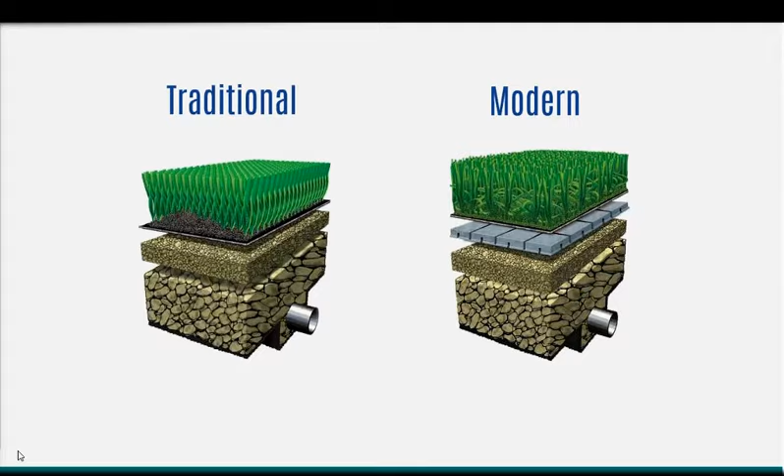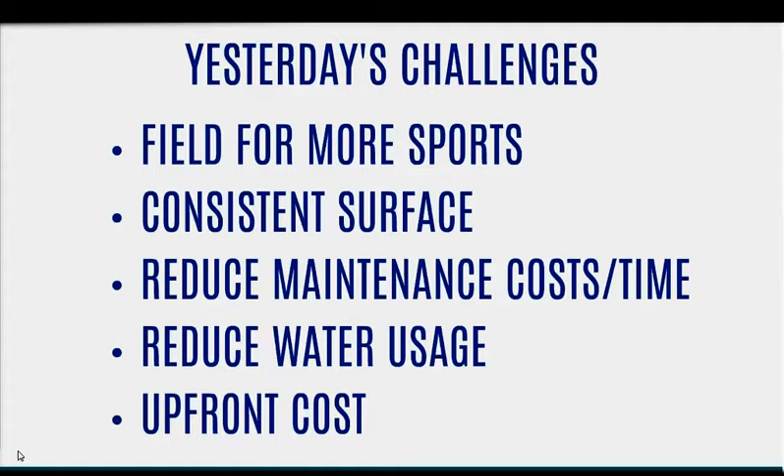So in the early 2000s, when the crumb rubber infilled systems became prevalent, field owners were solving for things like having a field that could withstand more use, having more reliable, consistent playing surfaces, reduction in costs, time to maintain, reduction in water usage, and the upfront costs associated with a new synthetic field.

If you flash forward to today, field owners have become a little bit more savvy and knowledgeable about the pros and cons of synthetic turf, and they're trying to solve for a whole new set of challenges, including but not limited to surface heat, reducing concussions and head injuries, building a sustainable system, reducing chemical exposure, and of course upfront costs and now life cycle costs come to the forefront as well.

The infill market is growing rapidly, and that's probably an understatement, in an effort to address these new challenges and concerns. In our travels, and when I say our, I mean Adam and I, we've seen a pretty significant gap in understanding of how these infills all perform and all these different characteristics that make up a new system.

So over the next 25 minutes or so, we'll take you through each infill one by one. We encourage you to follow along with your infill sample tower, and once we have covered each infill individually, we'll then compare all 6 of the major categories with some visuals.

We will be as objective as possible. Admittedly, we do have an intimate knowledge of the coated sand category. Our flagship product, of course, is Envirofill. So just help us stay honest along the way.

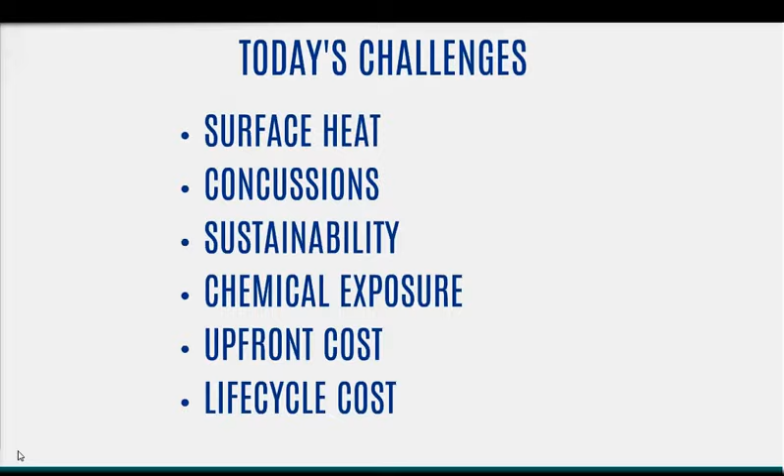All right, this will be more technical than our first presentation, but certainly not intended to be all-inclusive. There's an infinite amount of tests and things that could probably support each variable to the infill, pad, and turf system, but we're going to try to cut through that clutter and kind of boil it down for you.

The overall intention is to provide further insight into the materials and help provide some guide rails or some guidance as to what may be the best for your unique challenges and considerations.

So we sent out an infill tower to all those who registered before yesterday. We really felt that it'd be more effective if you could experience the products while we were talking about them. It's one thing to kind of talk about it conceptually, but I think it's another thing to put the products in your hands, experience them for yourself, and kind of draw your own conclusions along with ours.

So we'll start with the bottom of the tower and work our way up. We welcome you to open the tower and follow along. You can take the product out, put it in your hands, kind of roll it between your palms and experience it as an athlete might on the field.

All right, so as we review each of these products, this is what the criteria will entail: surface heat, understanding how the infill can assist in making the surface less hot. Crumb rubber will always be our benchmark that we're trying to improve on, and all these infills will produce some heat benefit, cooling benefit over a crumb rubber system.

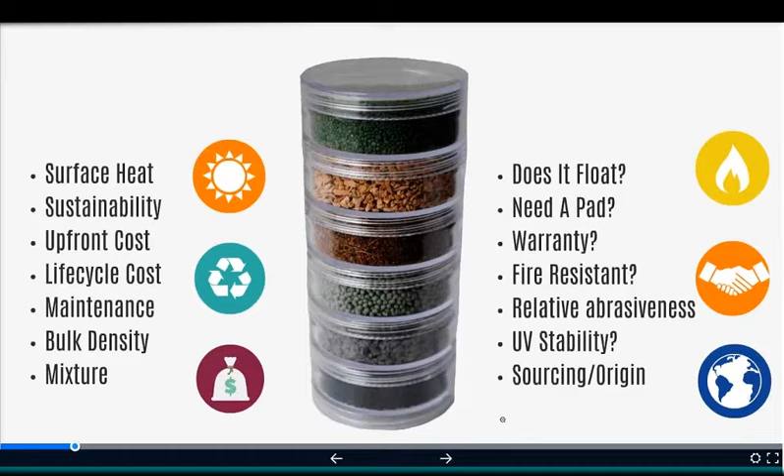There are 4 major categories that were covered today, and then a 5th category of infills that don't really meet the criteria or fit as neatly into the other 4 categories. Then we'll close, as Stephen mentioned, with charts that will boil all this information down and give it to you in easy to read charts.

All right, first up is a product we're all familiar with, and that's crumb rubber. It's been widely used for the past 18 or so years, and frankly designers are really comfortable using and specifying it. While the performance might not always be ideal, it's known and somewhat predictable. Designers at this point know the turf height, the density required, the amount of rubber and sand they should specify, and they also know the range of cost for the product, so it's fairly easy to predict the budget and how the bids might come in.

This product has come under intense scrutiny because it's been surmised that one or several of the 96 chemicals in crumb rubber might be carcinogenic to young athletes. And while that's a serious issue, we're not here to take a side, but rather open the possibility of incorporating one of the other many great infill products available on the market today, and expand the thinking beyond crumb rubber.

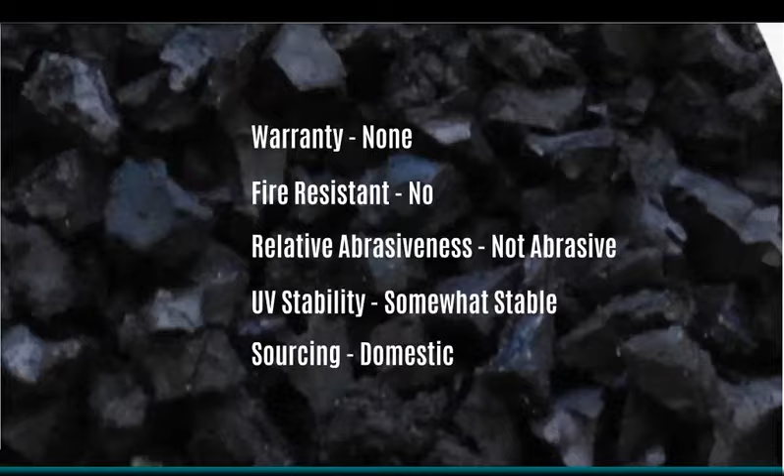The next category is virgin rubber, and these of course play very similar to crumb rubber systems. If an owner is looking for similar playability, they have the choice of two types of virgin rubber, EPDM and TPE. The distinct advantage of these products over crumb rubber is that they are virgin, so they can be made up of known components which can be modified to avoid specific chemicals.

Virgin rubbers can be put in the same tall pile height as crumb rubber. However, because of the cost, one approach is to lower the pile height and add a pad.

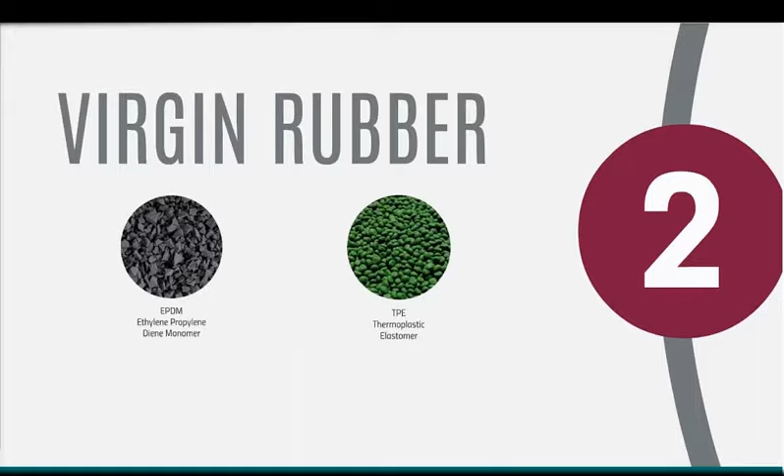EPDM is most commonly known as track rubber, and it comes in a wide range of colors. You'll see by the gray sample in your tower, its shape is irregular, just like crumb rubber.

The lighter EPDM colors can be used to reduce the surface temperature and reflect more of the sun's energy. I think it's important to clarify that while some heat benefit can be gained by this product and some of the other products we're going to list today, it's by no means a cool solution. We think a more accurate description is less hot, and you'll hear us use that term throughout today's presentation.

To build on that a little more, if it's 95 to 100 degrees outside, your synthetic turf with crumb rubber could be somewhere around 170 degrees. Now, if one of these products lowers your temperature by 20, 30, 40 degrees, that's great, but you're still dealing with a surface that's anywhere from 130 to 150 degrees. So I think the best description here is less hot.

EPDM is not recyclable. It is a chemically set product that can't be reversed. The cost of EPDM is somewhere in between crumb rubber and TPE.

It should be noted that not all EPDMs are created equal. Granules based on EPDM actually only contain about 20 to 25% EPDM rubber. The rest consists of things like chalk, processing oil, UV stabilizers, antioxidants, pigments, and other vulcanization materials. So the quality can really vary wildly between manufacturers and from product to product. As a specifier, you really need to do your due diligence and specify the right EPDM for the application.

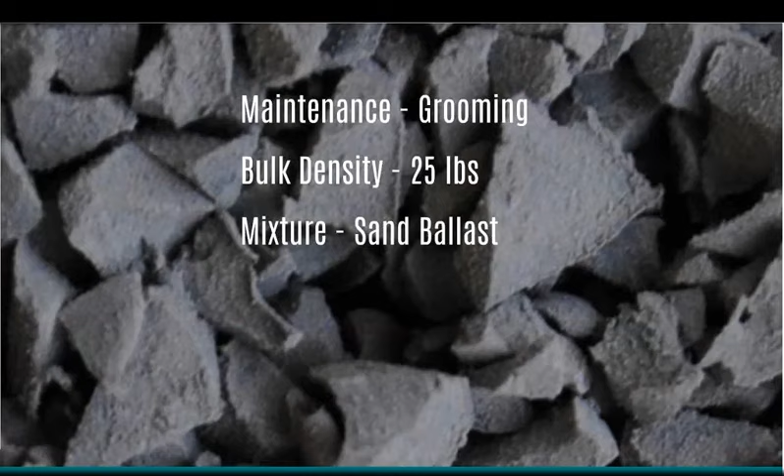Just like crumb rubber, it's always used with a subangular sand. And again, some of it will float due to the surface area and trapped air, but the specific gravity is greater than 1, so it will sink over time.

While EPDM does provide resiliency, we see it mostly installed with a pad. The warranty range, depending on manufacturer, is between 8 and 10 years. And it can be made fire resistant with additives.

Just like crumb rubber, it is an angular rubber product, but still very resilient, so we'll put it into the non-abrasive category. For UV stability, we note that it's somewhat stable, just because we know that UV can really wreak havoc on rubber products in direct sunlight. And it's available both domestically and internationally.

All right, so next up is TPE, and it's very similar to EPDM with a couple exceptions. For one, you'll see by the image on the screen and the product in your tower that it's very uniform in shape. Another exception is that it is thermally set, not chemically set.

I know Stephen mentioned this analogy in the last webinar, but it's worth repeating because we get a lot of questions about the difference between these products, and this is the best way to keep it straight. So if you think about asphalt, like TPE, being a thermally set product, the components are able to be separated once heat is reapplied. But concrete, like EPDM, is chemically set and cannot be reversed.

So in much the same way, TPE is recyclable, but also susceptible to softening during high heat if the right solar radiation zone product is not selected.

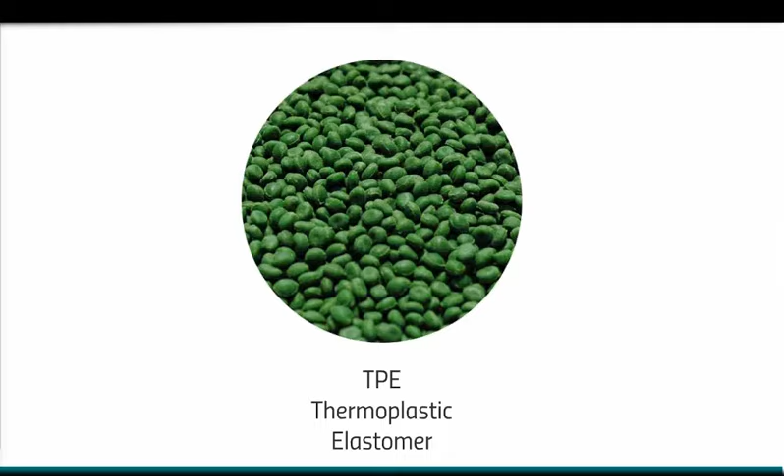All right, so let's get into the details here. Just like EPDM, the lighter colors, so most commonly light green and tan, can help reduce the surface temperature by reflecting the sun's energy.

We put somewhat sustainable, so we did identify that it is recyclable. However, there's a difference between theoretically recycling it and actually logistically going through the process. The challenge here is removing it from the sand ballast. The particle sizes are really similar between TPE and sand, and they really only differ in their bulk density. So in order to recycle the TPE, it would need to be processed to remove and separate out the sand, and as of now, we know of no such process that can do so on site. That's why this one is going to be somewhat sustainable until the technology can catch up to it.

Of all the virgin rubber materials, TPE is the most costly. As with EPDM, it's important to select high-quality producers who understand how a product in this application should be produced. And TPE is not reusable for multiple turf life cycles. Therefore, new TPE would need to be purchased when a field is replaced, thereby giving it a high life cycle cost.

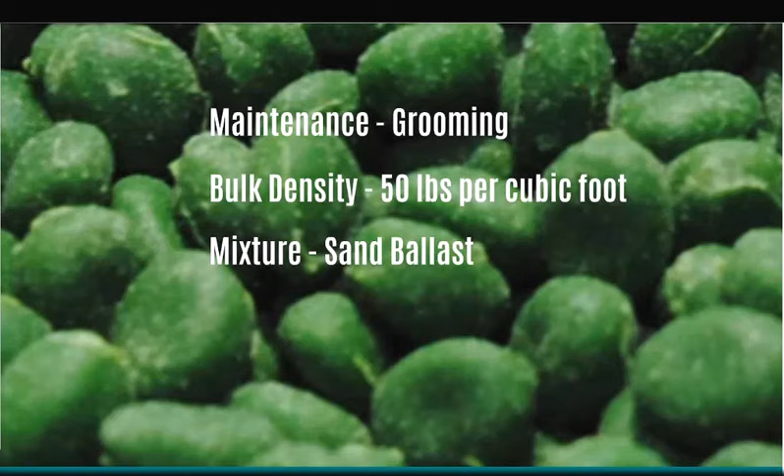Like all the other rubbers, it's almost always used with a subangular sand. And to elaborate on that a little bit, the sand is used as a ballast. You need a certain amount of weight on that sports system to hold it down so it doesn't wrinkle when you have a big lineman cutting, or move with expansion and contraction with the temperature.

This product doesn't float, and a pad is recommended. So while TPE does provide resiliency, a pad is often installed. Usually for near the same cost as an additional pound of TPE, one can install a pad.

So we see a lot of field owners go ahead and opt for the pad, which can be used for multiple life cycles. It's more of a long-term investment. And then they shrink down the pile height to maybe 1.5 inches or 1.75 inches in order to use less TPE.

The warranty ranges from 8 years for hot climates up to 10 years in cold climates. Like EPDM, fire resistance is available with additives.

And if you pick up the TPE, you'll notice that the granules are quite consistent and resilient. As compared to the EPDM, the TPE will compact less because of the consistent shape of the product. Later in the presentation, Stephen will show you a chart that will show the relative abrasion of all these products.

UV stability, we put somewhat stable, or kind of a medium rating, because you really need to be cautious where you're using these products and what solar radiation zone you're in. And this product is available both domestically and internationally.

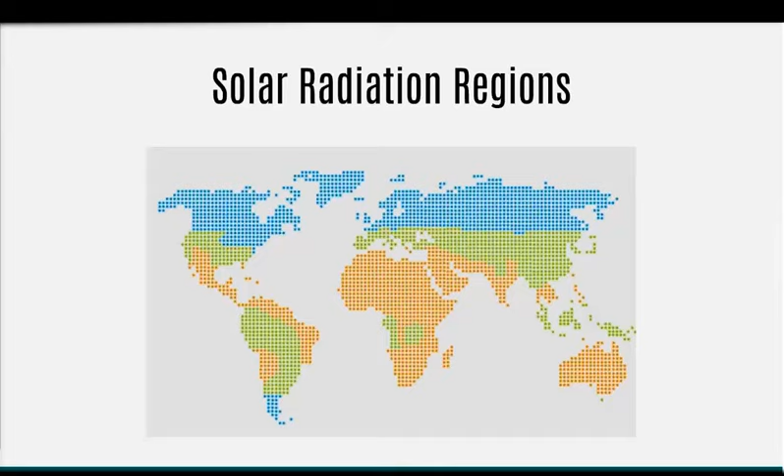So my guess is that they chose the less expensive product and didn't take the more conservative route of going with the one that's going to be more resilient in that environment. So they certainly won't all melt, but if you select the right TPE, it will hold up in that environment. It's just really important to understand that not all TPEs are created equal. Great.

So organic infills are kind of following the same trend as organic fruits and vegetables, organic cotton clothing, organic cleaning products. All these things have attracted a lot of attention in the last few years as our world seeks to get back to natural products. So the thought with organic infill is sort of a 'you can't beat her, join her, Mother Nature' type of approach, and the desire is to avoid chemicals and other synthetic additives altogether.

So we're going to cover two categories of organics: coconut and cork.

One of the products that's been around for quite some time is Corkonut. It's been around since about 2004 and is a blend of cork granules and coconut fiber. Both of these products degrade really slowly, and sometimes they're actually joined up with another product like rice husk.

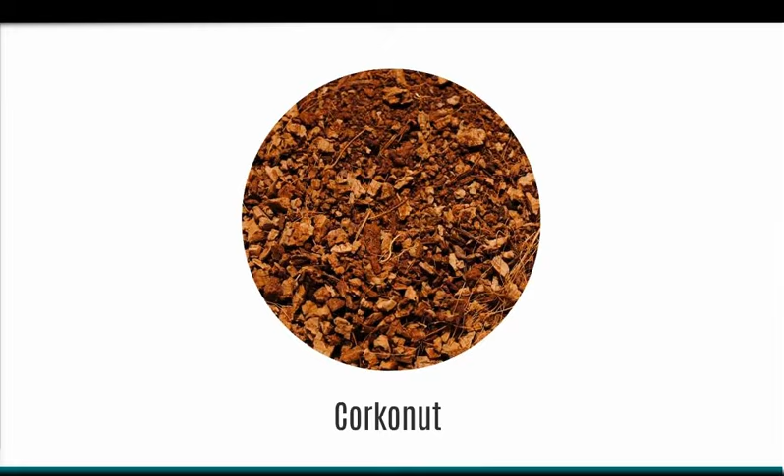Corkonut is really good at retaining moisture and releasing it over time through evaporation, and this mimics Mother Nature's cooling capability of natural grass. However, unlike natural grass, which can bring moisture from the soil below through the root zone and then release it into the air, organic infill must be regularly wetted to activate the cooling process.

This is challenging for arid climates which don't have regular rainfall. As a result, if these products are installed in dry climates, you have to add a watering system to your field. This can be either a permanent system, like an 8-head, 4-zone type of system, or a temporary system like a large hose wheel. Either way, it's going to require a lot more management to maintain ideal conditions, which is about plus or minus 50% moisture content.

It's going to require a lot more management than other infill products, so it's really important that your maintenance staff and team is prepared adequately and trained to be actively involved in managing this type of system.

Cork and coconut are both renewable resources. It's interesting that the cork tree is harvested every about 9 to 12 years, depending on conditions, while coconut trees are harvested year-round - there's no season, they just continually put out coconuts. If we look at the LEED definition, a rapidly renewable product is one that has a harvest cycle under 10 years. So both of these qualify, although cork is right on the edge, depending on conditions.

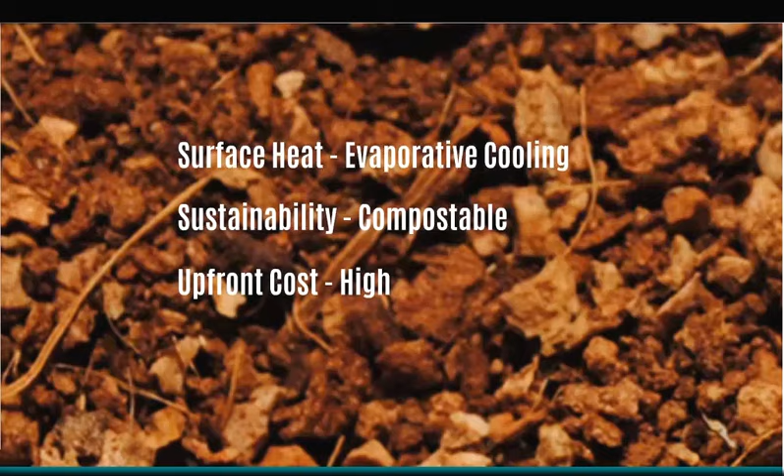At the end of the field's life, this product can be reclaimed, composted, or even mixed with topsoil, which is a significant advantage over taking it to the landfill. In addition to the product cost - 2 pounds of the coconut blend with 3 pounds of sand - the field owner should also consider the regular top-off of the field, irrigation, and active management over the field's life.

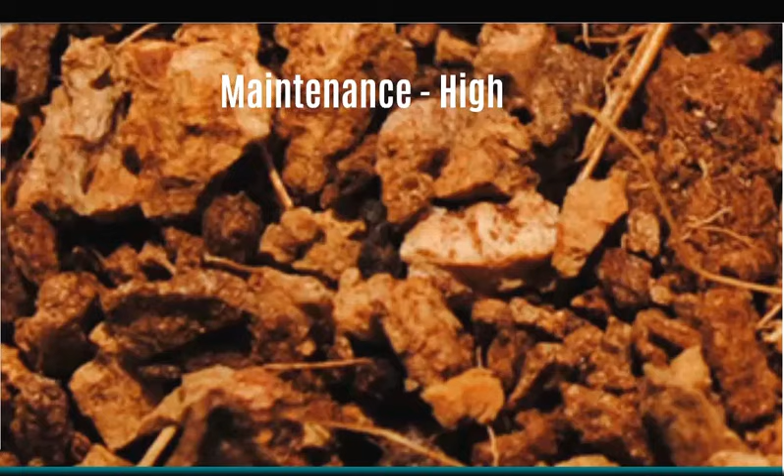Active maintenance is required, as mentioned, to ensure optimum moisture content is maintained. Also, the material has a tendency to move or float in heavy rainfall, so I would plan for some regrooming and redistribution of material, especially in high-use zones. Settling and degradation does occur over time, so periodic application of new material must be taken into account. Usually when the field is installed, they'll provide the owner with some attic stock that they can use over the years to address areas that may need attention.

The bulk density is about 10 pounds a cubic foot, but it really depends on the blend between the coconut and the cork. Because of their light bulk density, pretty much all organics will use some sort of sand ballast.

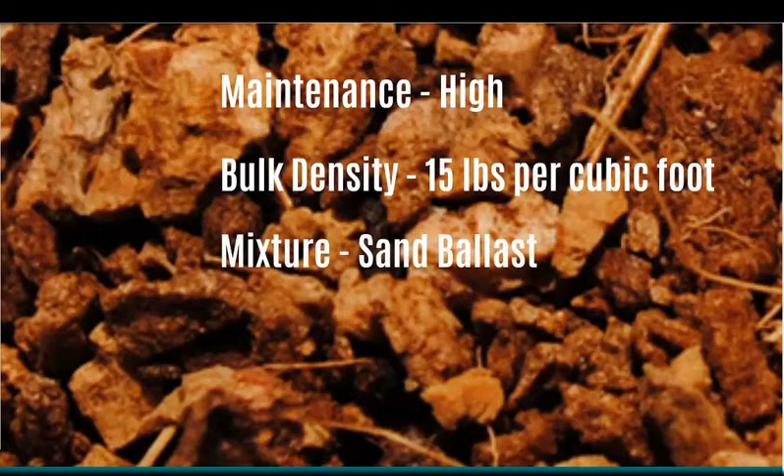This product is designed to absorb and release water. If you put these products in water, you'll see that the cork stays on the surface, as does the coconut, until the coconut absorbs the water and then falls to the bottom. But the cork will remain on top for a long period of time.

A pad is recommended, so while the cork does provide you some resiliency, the pad ensures that you have consistent resiliency over the entire field.

This product does not have a warranty. Cork by itself is fire resistant, but the coconut fibers themselves are not.

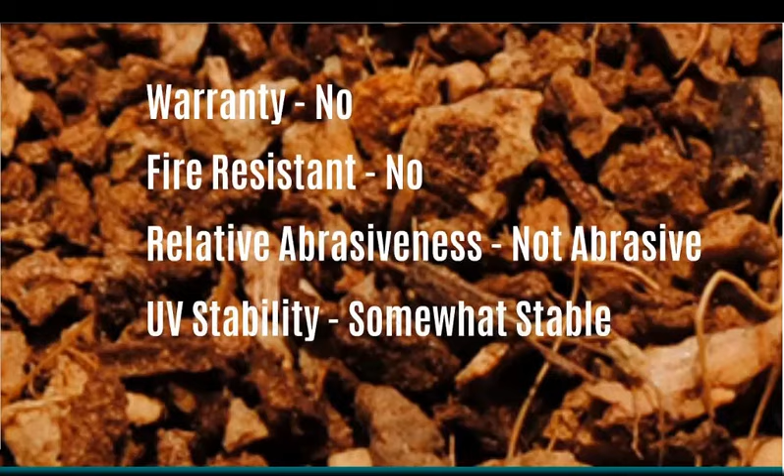It's not abrasive. When you pick it up in the sample tower there, you can see that it's actually quite soft. And again, like the other organics, this product will break down with extended UV exposure.

The sourcing of both of these products is international. Cork primarily comes from the Mediterranean region. Actually, 50% of the world's source of cork comes from Portugal. And the other regions include South France, South Spain, Italy, and some in Northern Africa.

Now, the coconut portion of it is actually sourced in Asia. Sri Lanka and India are among the biggest providers of coconut fiber.

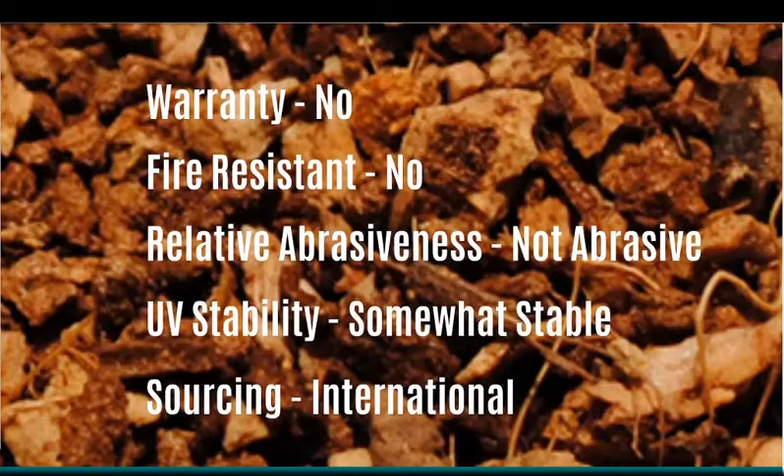So another option for an organic system is using cork strictly by itself. Cork does not absorb water, one of the great reasons it's used as a wine cork. But it is compressible and recoverable.

Just a few quick facts about the cork tree. It's first harvested at age 20, and then every 9 to 12 years until it reaches about 200 years of age, when it's no longer productive. Its peak harvest is around year 80, when it produces about 440 pounds per tree.

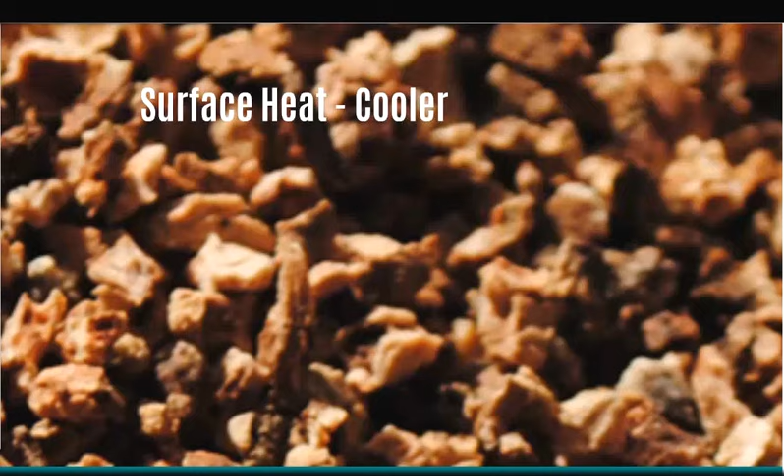So the primary reason to use cork on your field is to reduce surface temperature. Cork absorbs a lot less solar radiation than crumb rubber, but because it doesn't absorb water, it does not cool through evaporative cooling like a coconut product would.

Cork is a renewable resource, and like I mentioned, it's right on the edge of being defined as a rapidly renewable resource, but we might just be splitting hairs there. And it must be sourced from the place that it's grown, which is the Southern European region.

So the cost per pound is the highest of the infill options we'll cover today, but again, it needs less poundage to take up the same amount of volume as the other products.

Life cycle cost: field owners should account for migration of the material. It's naturally non-static, so it won't stick to your clothing. However, wind motion and water will really cause this product to move around the field. And I'll invite you to open up your infill tower there, and you'll see how drastically light this product is.

This product will need active maintenance to ensure even distribution across the field, since the material does have a tendency to float or move in heavy rainfall. Periodic application of new material should be taken into account, and some of that can be done by facility personnel, while some of it has to be outsourced to a contractor.

It can be used as a top dressing over top of, say, a crumb rubber field, but when used by itself, it's primarily used with a subangular sand. It does float. Interestingly, it is fire resistant, and from an abrasive standpoint, it is the least abrasive of all these products—really quite soft.

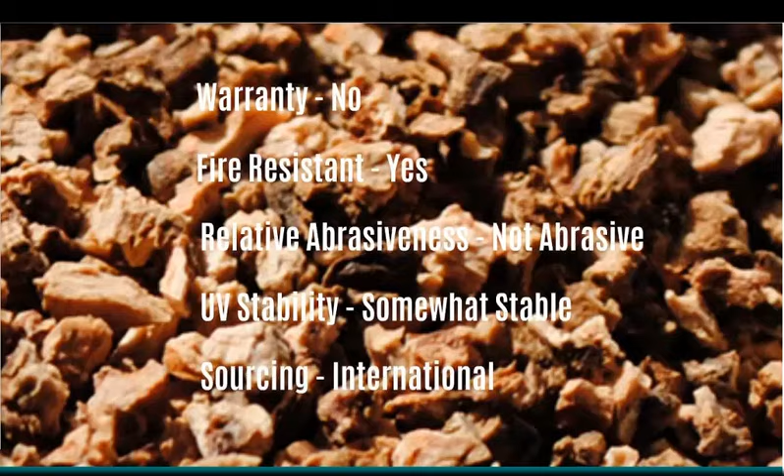Like other natural products, it will break down with exposure, and we covered that the sourcing is in that Mediterranean region.

We did have two more questions come through while you were working through cork. Is there a testing protocol for agricultural products regarding pesticides, agricultural or organics?

That's a good question, because we certainly don't want to trade one concern for another. The one I would lean on or refer to is the Synthetic Turf Council Infill guidelines. In 2015, STC, an industry group that helps support and guide the industry, developed a list of guidelines and testing protocols that can be used for any type of infill.

Circling back on the question about warranties, it definitely looks like two of the larger cork and coconut producers do have an 8-year warranty. So again, we ask you to keep us honest—you guys are doing that. We'll take a look at that and update for the next presentation.

Thank you. Great. I'm actually going to take over here for just a second and take us through the coated sand category. As mentioned at the onset, we do manufacture a coated sand product called Envirofill, but I hope we've shown our objective approach to alternative infills, and the same is going to hold true for this category.

Our thinking is that there's not one product that is right for every customer situation, and there are a lot of new products on the market that haven't been fully vetted. Envirofill has been produced in Texas since 2005, so its properties and performance are well known and documented. It's based on a round sand core, which is coated with a very durable acrylic polymer.

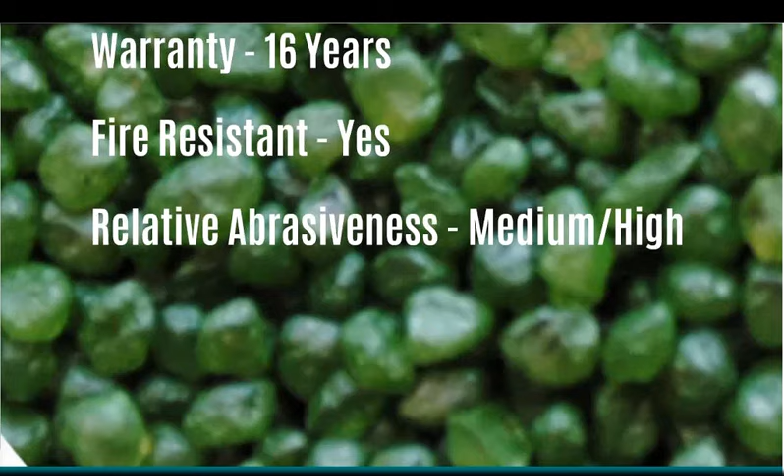It has a 16-year product warranty. It is fire resistant. And Envirofill is going to be more abrasive than the other infills we're talking about today. As is the case with all infill, abrasion becomes less of a concern as the turf fibers begin to fibrillate.

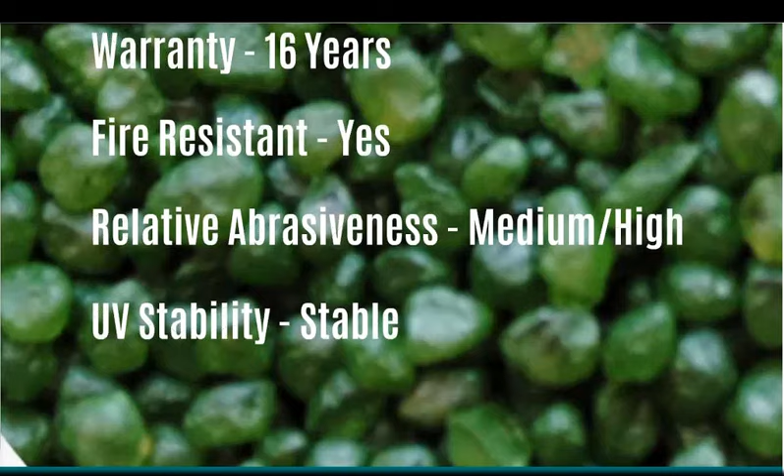Coated sand is very stable in an external environment, and finally, it is sourced domestically. It's made in Texas.

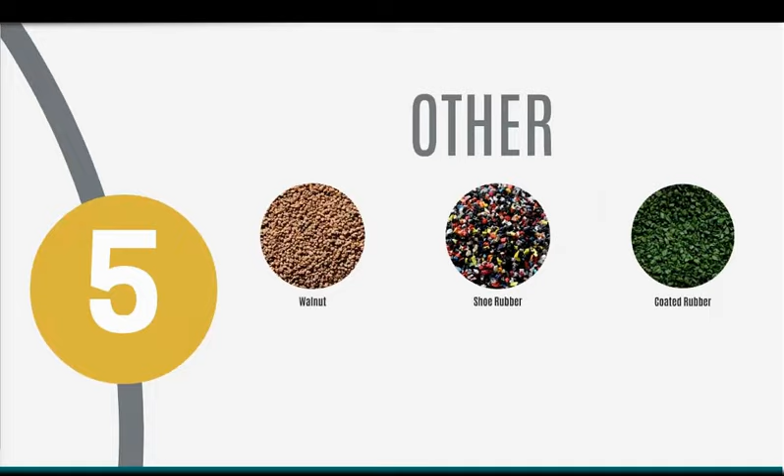So another organic that's been developed and tested in just the last few years is walnut shells. Walnut shells are the hardest nut shell on the planet and are grown here domestically. The shells are ground up to various sizes, some of which are ideal for sports systems.

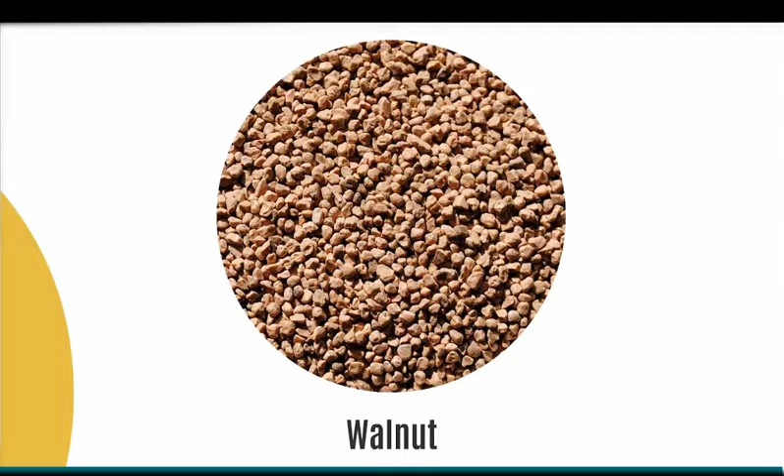Now, one of the drawbacks that's been called to attention is that there's a tree nut allergy issue in our schools. So how can we introduce a product in the field that may exaggerate that issue? There are some processes in development that will remove that allergen and create a safe product. Also, like coconut and cork, this product degrades very slowly over time.

So this product is pretty interesting. It's recycled shoe rubber, and it's also known as Nike Grind. Most of the feedstock is post-industrial, while some of it is derived from post-consumer.

There are shoe recycling facilities in both Memphis, Tennessee, and Belgium that take any type of gym shoe, separate it from the upper sole, and grind it up. There's also a facility in Asia that processes pre-consumer rubber waste, like off-spec material that was destined for shoes.

A full-size soccer field requires about 75,000 pairs of shoes. So as you might imagine, the availability of this product is pretty limited, and the manufacturing processes continually look to reduce waste. So I think over time, this product could be less and less available.

And actually, to my knowledge, few people actually recycle their shoes. So for that reason, it's sometimes used in combination with crumb rubber or one of the other virgin rubber materials.

The process is actually pretty cool, and there are some YouTube videos available online. There's a website called lessismore.org, and you can find information about how to be one of those people that actually recycles their shoes.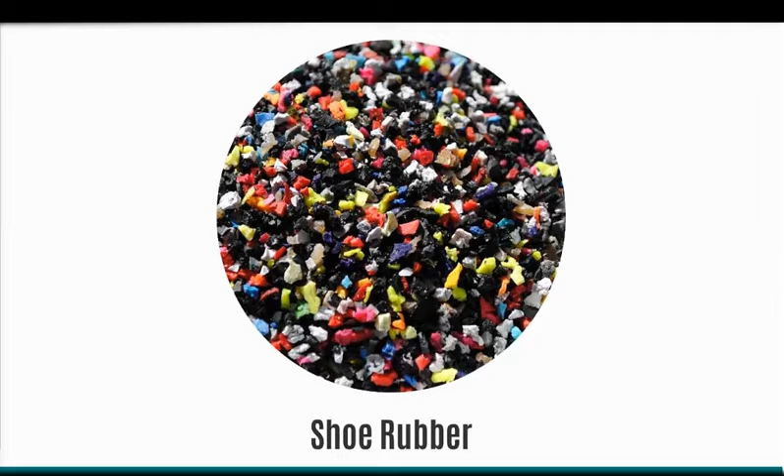So coated rubber is another infill option. It coats the rubber, or the SBR, or recycled crumb rubber, with a polymer that not only helps the aesthetic and gets rid of that five o'clock shadow, but also reduces the VOCs, volatile organic compounds, and the heavy metal runoff from standard crumb rubber material.

And the coating on this product is also warranted for 8 years. Just to highlight, I think 8 years is the common warranty of a lot of these infills, because the turf product itself is also warranted for 8 years. That doesn't mean that year 8 and 1 day everything falls apart, but that's the amount of time when the product is going to perform in its optimum range.

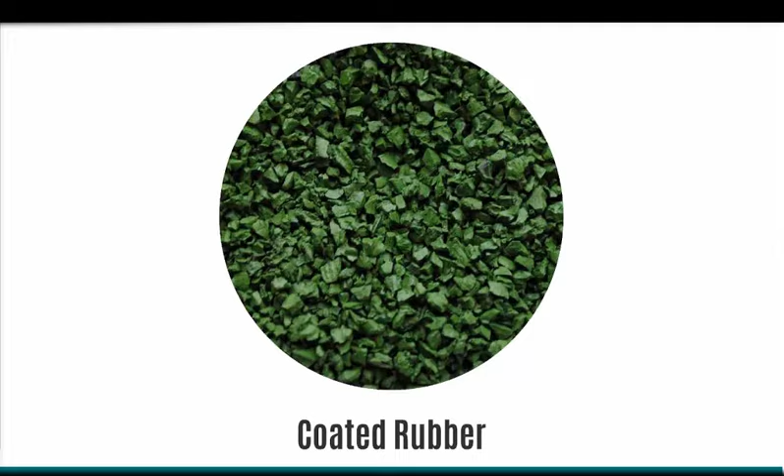So at this point, Stephen is going to help us visualize how all this infill stacks up against each other. We've gone over a lot of information, but we hope this next portion here will help boil it down to more easily understood content.

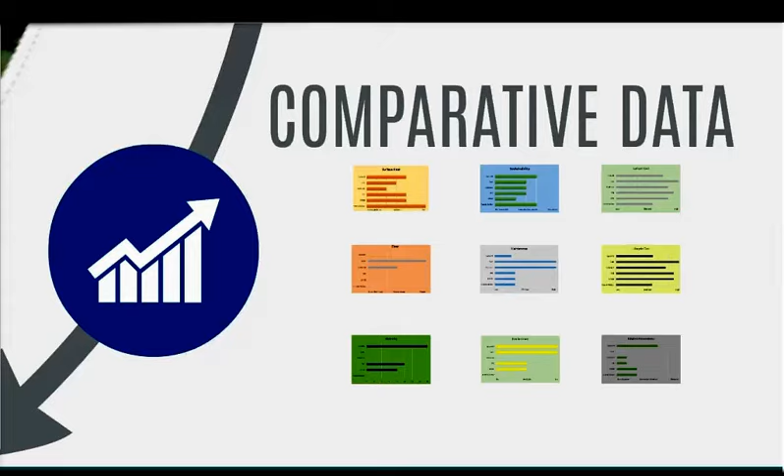So in an effort to simplify the comparison of these products, we've created some basic charts using a good, better, best, low, medium, high type of format. The left axis of each chart is going to match the infill tower that we sent over. Of course, EnviroFill is at the top, crumb rubber will be at the bottom, and then everything in between.

So let's start with surface heat. As we know, synthetic turf can be excessively hot. Black crumb rubber absorbs the heat and is going to be the hottest infill. Cork, by itself, is going to be a little bit cooler. Corkonut has the ability to absorb water and release moisture over time to cool the field, making it the coolest infill.

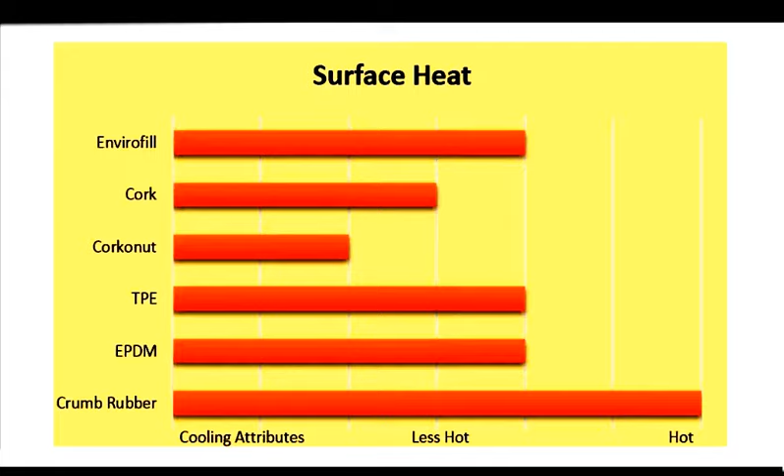TPE, EPDM, and EnviroFill, primarily due to their color and product makeup, are going to be less hot than crumb rubber. Again, the caveat there, if it's the middle of summer and the sun's beaming down on your turf, it's going to be pretty warm regardless of the infill.

Sustainability. We are defining sustainability as the endurance of the system. This includes manufacturing, transport, and end of life.

So a product is going to be most sustainable if it's domestically sourced from a waste stream product and avoids the landfill at the end of life. Contrary, it's going to be the least sustainable if it's internationally sourced, a virgin product, and has to be thrown away or discarded at the end of life.

For example, crumb rubber is a waste stream product that is sourced domestically but has end-of-life challenges. TPE is a virgin material, domestically sourced, and theoretically recyclable. EPDM is a virgin material sourced domestically and discarded at the end of life.

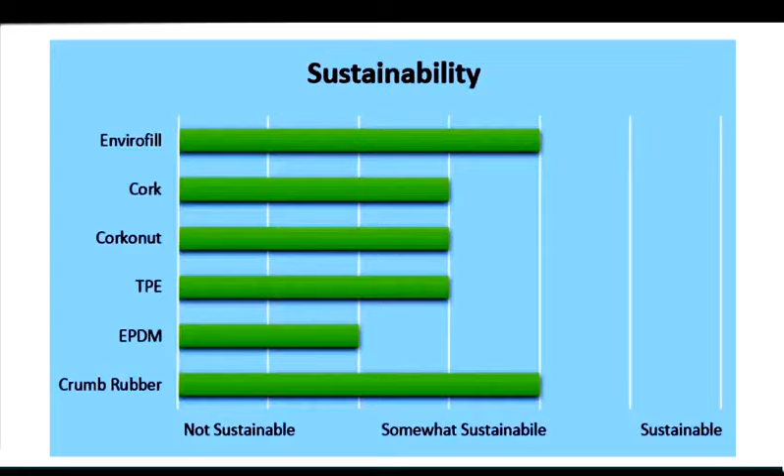Corkonut is a waste stream product to some degree that is sourced internationally and can be composted at the end of life. Cork is renewable, sourced internationally, and can be composted at the end of life as well. And finally, EnviroFill is a hybrid of virgin and waste stream products, sourced domestically, and can be reused at the end of life.

Upfront cost is a consideration that I'm sure is at the top of most people's minds. You all shared that with us on one of the first polls. Crumb rubber's greatest attribute is going to be those upfront economics. It's readily available and at a low cost. Most of the alternatives are going to be comparable in terms of upfront cost.

TPE and cork tend to be on the higher end. And just a point of explanation, this chart's going to assume that there's an addition of a shock pad for each infill. So before you go on, Stephen, I think it's interesting: once the owner commits to a pad, then all the infill options are kind of within the same range. It's not like a 2X type of scenario once a pad is in the picture from the onset.

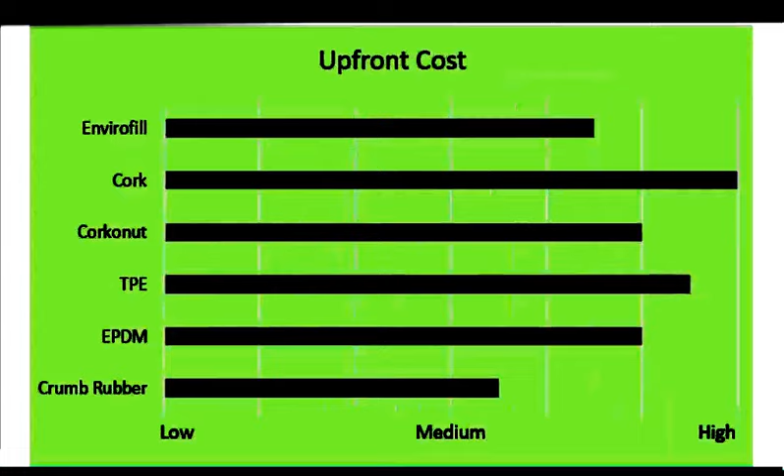And again, at least from where we sit, we feel a pad is certainly worth the added investment. The value is there beyond just some of the safety attributes that it has. A modern system should have a synthetic turf pad, a shock absorption pad.

Life cycle cost is where we start to see some separation from one infill to the next. EnviroFill with a 16-year warranty and ease of reuse help lower these costs. Crumb rubber can be reused as well, but can incur that disposal cost that Adam referenced.

He also mentioned that each turf manufacturer is going to desire a different mixture ratio of sand to rubber. But data we've collected from our sister companies suggests about 1 out of every 4 removals, they're reusing the rubber and sand mixture. Cork is going to have the most upfront cost, significant maintenance costs, and cannot be used for more than one life cycle of turf that we're aware of, making it the highest in life cycle cost.

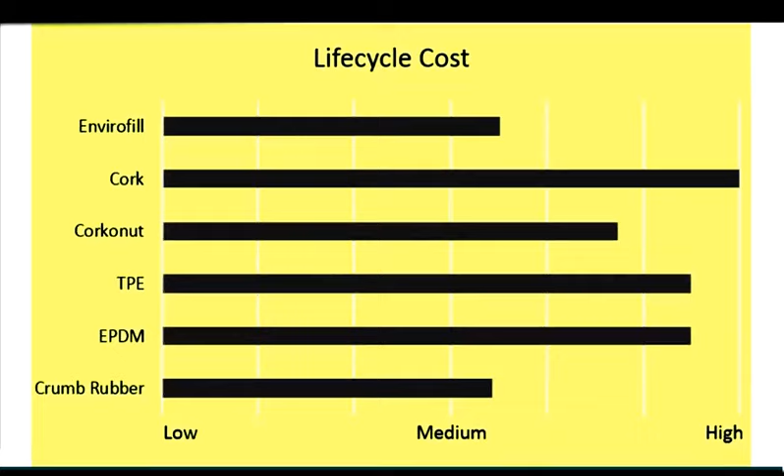Corkonut is at the higher end also for those very same reasons. TPE, EPDM cannot be reused as far as we know. Again, we'll look into the discussion around some of the TPEs.

Maintenance. I kind of alluded to this in the previous one, but this is going to vary pretty greatly from product to product. Oftentimes we see clients that are only focused on that upfront cost as maintenance is funded separately from capital projects. A product like Corkonut, for instance, you must factor in that cost of irrigation, as much as a 15% annual top-off.

Cork is also going to require annual top-off due to the floating and migration characteristics. On the other hand, crumb rubber, TPE, and EPDM are all fairly low maintenance, requiring consistent grooming and refills in high-traffic areas. EnviroFill is groomed the same way as rubber and virgin rubber, the difference being that its bulk density, when paired with the right turf spec, will experience far less migration and therefore require less topping off.

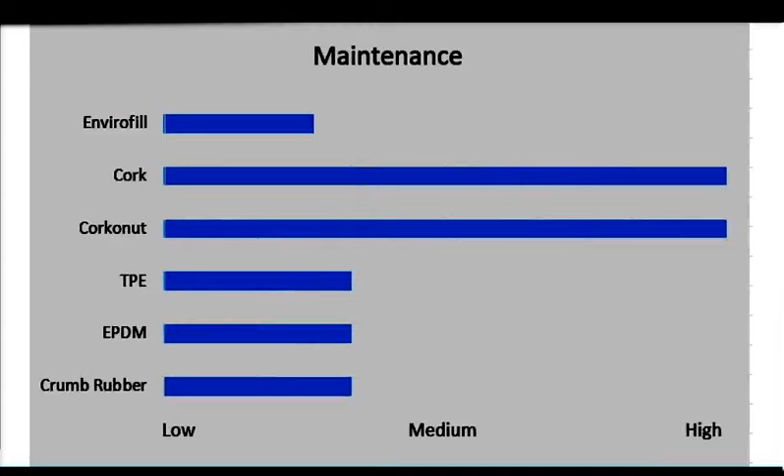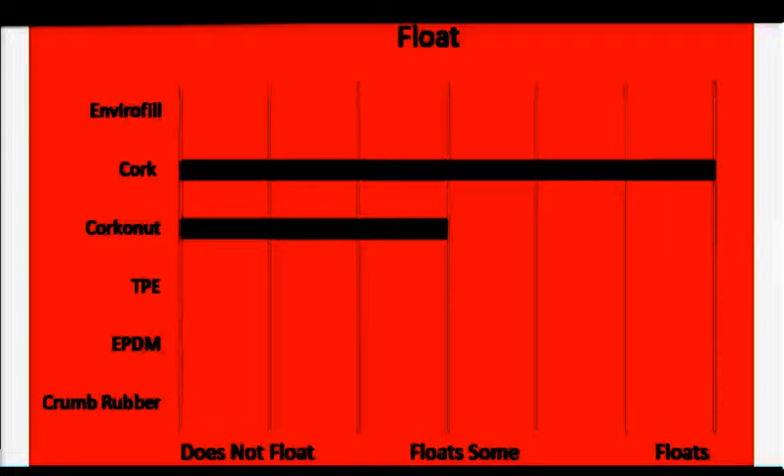Adam went through each of these as well, but does it float? We invite you all to take a pinch of each of those infills and drop it into a jar of water yourself. But you'll see that everything but cork will eventually sink. And those products that take a little bit longer, that's because of the air pockets that may be caught in it or the surface tension.

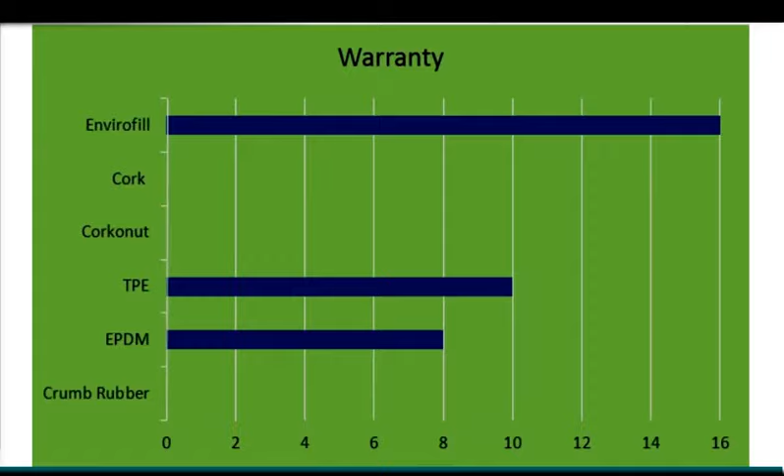Fire resistance, as Adam noted, is especially important for indoor facilities. Cork is fire resistant, as is EnviroFill. TPE and EPDM can be fire resistant with additives, while crumb rubber and Corkonut are not fire resistant.

For relative abrasiveness, we're looking at each product on its own, absent of turf. As you can tell by putting each of these infills in your hand, EnviroFill will be the most abrasive, and cork will be the least abrasive.

Before moving on, I do want to point out that we do not have specific charts for UV stability, pad or no pad, or mixture, as those are pretty straightforward. All of the products are fairly UV stable. We recommend a pad in all cases, and all of the products are mixed with a sand ballast except for EnviroFill, which again is installed homogenously.

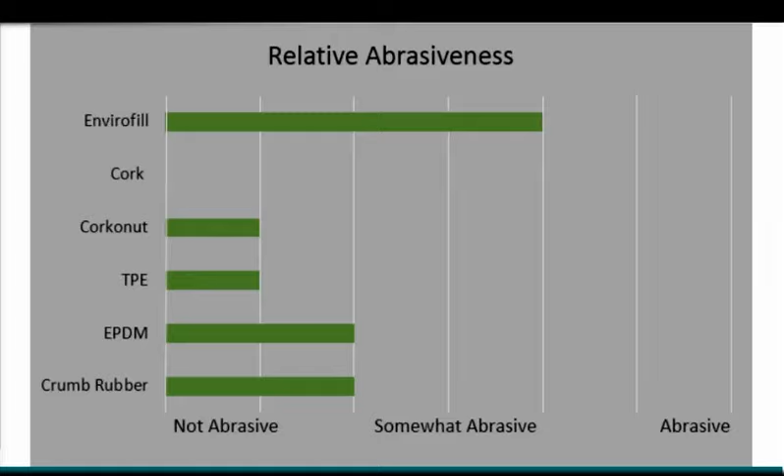While that's loading, we did have a question about the abrasiveness as it pertains to the turf fibers. All of these products are designed so that they do not harm the turf fibers. That abrasiveness is not such that it's going to damage the turf.

All right, so you should see a two-part question here. We're asking you to think back to poll number 2. So after today's presentation, would you change the two infills that you initially considered? Or did we just confirm those selections for you? And if you would change your selection, which two would you choose now?